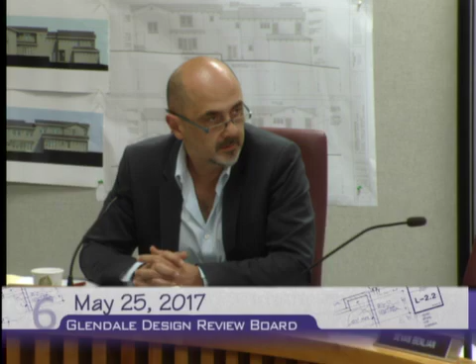Members of the board, this first item before you is the demolition of the existing buildings on site located at 2653 Manhattan Avenue. There is currently a one-story, 841-square-foot single-family house with a detached garage constructed in 1947, and the applicant is proposing to construct a new duplex.

The project is located on a through lot, which means you have a dual frontage, one on Manhattan Avenue and one on the opposite street, which is Pickens Street. So one of the units will face Manhattan Avenue, and the second unit will face Pickens Street. The design is one structure, two stories in height, with attached garages facing each street.

The total combined floor area for both units will be 3,332 square feet, not including the attached 441 square foot 2-car garage. The square footage of the lot is 7,022 square feet, and the project is located in the R3050 moderate density residential zone, which is multifamily. So in this case, the duplex is a permitted density based on the size of the lot.

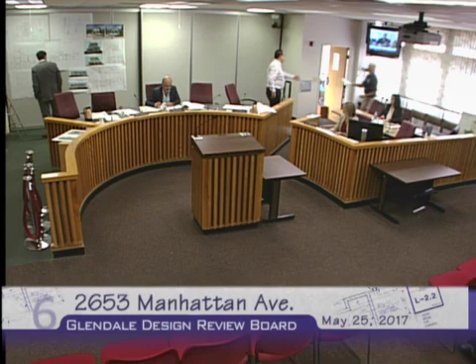While this is happening, I have a couple of questions. So this is an R3050 zone. Correct. What is the maximum height allowed? It would be 26 feet for a flat, but because this has a pitch, you get an additional 5 feet overall, so about 31 feet. Correct.

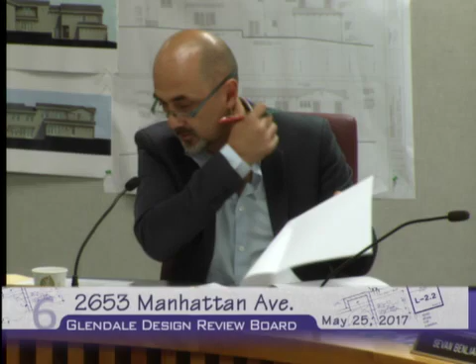Correct. All right, and then the question that I have is that when I'm looking at the southeast elevation, disregarding the design and everything, and the measurement that I'm seeing from the low point, which is on the left, shown as 26 feet, wouldn't that dimension be measured to the ridge line of the facade that is facing Pickens?

I mean, the overall building? I'm sorry, Board Member Malikian, what page are you looking at? This elevation, or any one of them, this one is going up to this point, but wouldn't it go to that point? Because that one is higher? It would be for the overall building. Overall height? Yes. Okay, overall height, okay, correct. So then if it is 25, or 26 plus another 5, so it should be okay.

It seems that there is a break in the grade, on the south or same elevation, or both elevations. There is a slope difference, a grade difference there. Hence the steps in the common area.

Okay, on the west-facing side, this has a 2-foot retaining wall. I believe there is a retaining wall there, yes. It's actually a 3-foot retaining wall, and some steps as well, which are shown on the landscape plan.

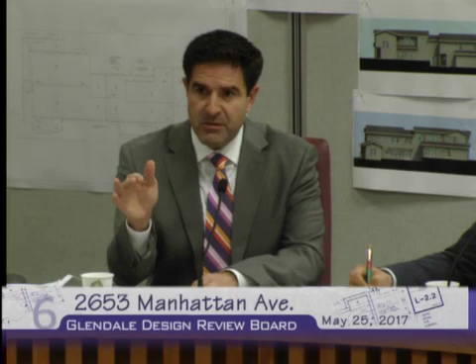Okay, thank you. I had a question as it relates to reducing mass and height of the building. So you mentioned that you might be able to shave a foot off the structure. What are some other ideas you could think of, very quickly, as far as lowering the height of the building?

If it came to it, we could drop the ceiling height on the first floor as well, from 9 to 8. But if you wanted to avoid reducing the ceiling height, grading-wise, let's say if you graded a little bit more than what you're doing now, what do you think you could achieve? I don't think we can because of the oak trees, we need to protect the roots. I can let Jeremy discuss that, but in general we're trying to not dig down on this property very much.

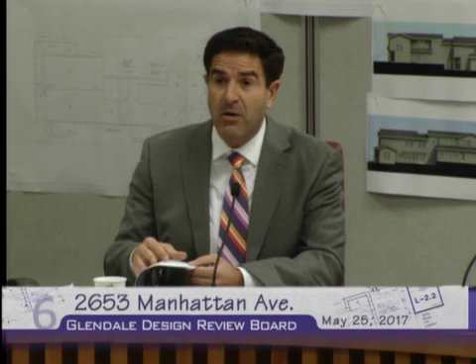Actually, maybe if you could stay up here for a question for the arborist.

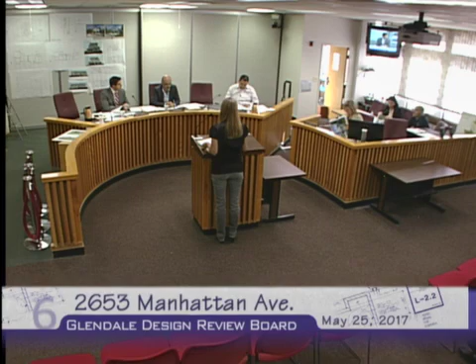Based on your observation of the existing trees, can the site be further graded if the intent is to reduce the height of the building? Can the site be further graded without damaging the existing roots of the oak trees? No, it would damage the roots of the existing oak trees. Okay, thank you.

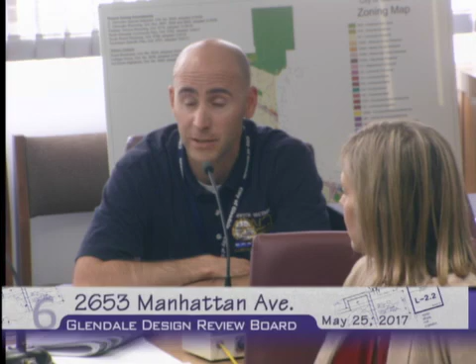Going back to Jeremy, I do have a question for you. It seems like there's a lack of information on the retaining walls and the cut and fill. There's some change there based on the section I've seen, because I don't have a grading plan. Have you reviewed the plans regarding these retaining walls that are proposed? They're going right under the oak trees and everything else. I have not seen a grading plan either. I do have a copy of the elevation plans, but I've mostly been going off the indigenous tree report and the site plans.

The question I have pertains mostly to the Pickens side. It seems there's a drip line that goes over the second floor already, and based on what I'm hearing, you've reviewed it and you're fine with the way it's being proposed. It's already impacting under the oak tree, so on the ground level it's the same. So is there going to be a huge impact if this is shifted over approximately a couple of feet so that this angle is in line with the back of this? The reason I'm asking is because it's going to affect the exterior. So is there a big impact on that?

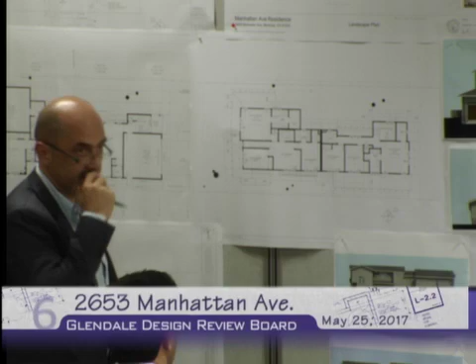The encroachment's almost the same. It's still within the drip line, so I wouldn't think so. Okay, that's all. If it was a question between eliminating it or putting it in, obviously that's different. Right, okay, so we can keep that in mind, and then we'll talk when we...

All right, Mr. Bellion, would you like to start?

Overall, I like the design. I think design and details are done well. I like the idea of keeping it consistent with the neighborhood, designing it as if it's two separate single-family homes. Designing it as two separate single families, even though it's one building, but you're creating two frontages, which is consistent with the single-family neighborhood. So I like that. I think there are a lot of good things going on with this project.

As board members we can appreciate the effort of designing around the oak trees. We always get projects where people take the easiest way, just take out two oak trees and plant a few to replace them. You guys are not doing that. You took the hard way and designed around that, and that's not easy. That's a big constraint.

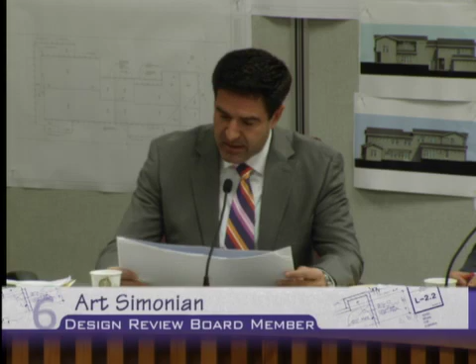Overall, I think just starting out, the Manhattan facade seems to read very well. It does have articulation, design features consistent with the craftsman style. The porch, the entry, the proportions, and most importantly, the roof line works very nicely off of Manhattan.

It was kind of nice to have the arborist input as well as we're looking at all the oak trees, because a lot of effort has been taken to try to accommodate the existing oaks, which we appreciate. And so—

On the other hand, as we look at Pickens, that facade and the roof design over that unit, I think has some room for improvement. If that facade is improved and that roof line is improved, in line with the same typology as presented on Manhattan, it will actually reduce the height of the building.

Aesthetically, because as we're looking at the Manhattan facade, you notice the roof in the background, which is really the roof over the living space off of Pickens. If that orientation is switched and some more undulation is done on the facade, then in reality you're reducing the amount of roof you're seeing from Manhattan, and it's a much more consistent roof line.

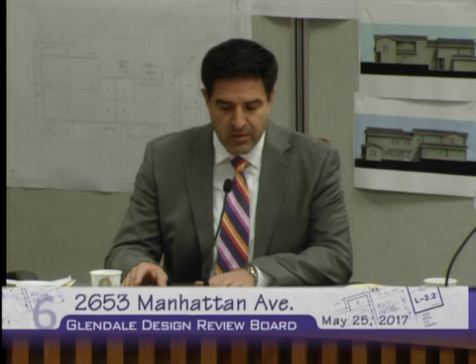Overall, I think the way to look at it is the overall mass of the building and the roof line should kind of conform. And if you're having problems with some of those side porches and side entrances, maybe with the use of some smaller garden walls, you could kind of create the landings that you need.

In a way, you got to look at the overall site, design the grading in a way that minimizes the height of the building, and then try to accommodate the actual landings of the side doors. That could easily be done with some garden walls to create those openings you need, and make sure those heights work accordingly.

So overall, I would support the project if we're able to rework the Pickens facade and undulate it differently, and also rework the roof line, which I think all kind of happens at the same time. Those are my comments. Thank you.

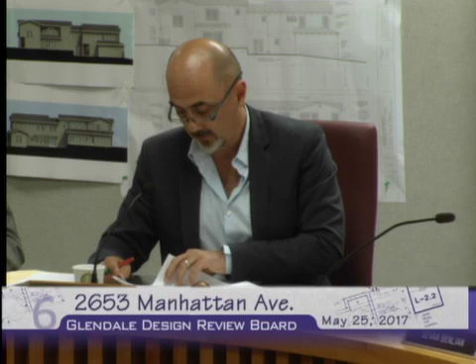I'm trying to assess the site plan and the amount of work that is being proposed, and it's fairly difficult for me to get a grasp on it. I've been trying to put together some ideas about what is happening between the landscape drawing and the site plan that is shown. I really think that the proper site plan needs to be put together so the city arborists can actually fully understand what is being proposed.

Some of the grading and the retaining walls are being proposed under the existing oak trees. Also, they would need to address some of the retaining wall off of Manhattan, how they're going to cut that off, because that thing is not really stable enough for it to be cut off, and how it's being wrapped around as shown on the landscape plan.

So a proposal should be given of how they're going to be removing a 5-foot retaining wall or so, whatever the dimension is. It's kind of vague on that part. As far as the Pickens elevation, and the reason I've asked those questions—

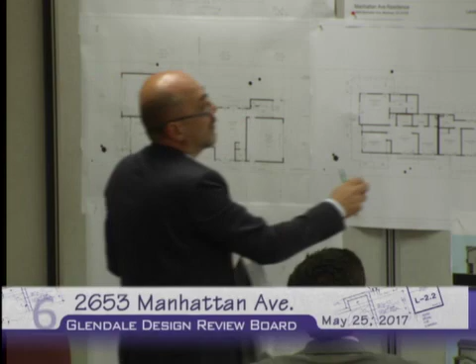I'll try to explain this: if this portion of the stairs and the patio, the covered porch and the stairs, could be pushed back at least a couple of feet so it's in line with the back of the garage, what it'll do is allow the entire section here to move back, creating something similar to this.

At the same time, I don't like to get into the bedrooms and everything, but if it's going to help make this project's exterior work better—right now this is not really selling the project for me. So it's not doing anything. I think there's definitely room to improve and be able to move this back.

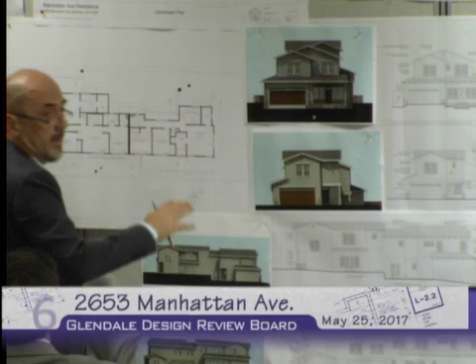So in order for the roof to be wrapped around as it has been on the Manhattan elevation, the detailing here lacks completely the effort that has been placed from this side. But there are ways, and the comment that I got from the applicant was about trying to avoid the roots of

damaging the oak trees. Most of the stuff we're proposing is on the second floor rather than the ground floor, so I think the ground floor will be designed with the observation of arborists being on site. So I don't have a problem with that.

I agree with the comments, some of the details and everything that's being proposed. So other than that, as far as the height, I'm fine with lowering it, I mean, eating up away from the crawl space, and be able to kind of differentiate the stepping and playing with the contour of the hill. So it's not going to jeopardize the design nor impact anything. It's actually going to be less impact to the trees as well.

Right, so which kind of dovetails with what you were saying. If there is a detailed site plan depicting the retaining walls as well, then they'll be able to carve that out. Yeah.

There is a discrepancy between some of the elevations that are being indicated on the landscaping and the elevations. The only elevations that I see as far as grades are shown literally on the elevation rather than on the ground site plan. So it's kind of difficult to locate the retaining walls and how much cut and fill they're proposing and so on and so forth.

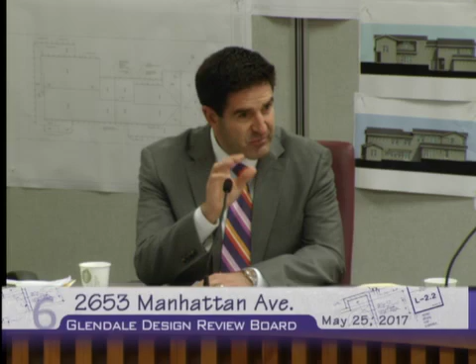I guess before we get to the second part, which is what you just were referring to, that deals with crawl space reduction from 9 feet to 8 feet, or the reduction of the crawl space, which is a separate condition. I think Board Member Malikian also indicated pushing back the facade on Pickens to create the sort of roof line that exists over the porch and the garage on Manhattan as well.

Now, the pushing back, is that on the second floor or just that portion above the entryway? Second floor, just the second floor. Okay, so actually creating a break in the front facade. Exactly, on the Pickens side. Create this kind of a roof, similar to the Manhattan side. Right, yes. Okay, I got that.

Another condition was to submit an accurate site plan and elevation that accurately depicts site walls, topography, and retaining walls. I would also include spot elevations so staff can accurately see the existing conditions and proposed cut and fill.

There was also something about considering modifying the interior floor plan, which came from Board Member Malikian. There are ways they can do that, such as pushing the stair section, porch, and stairs back. That would be a condition in order for them to break up the second floor, for example, by doing the floor plan modification as well.

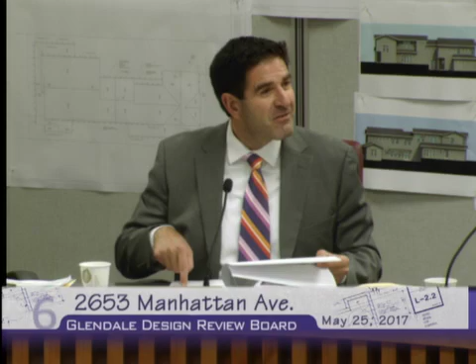Let's clarify that as a condition. I think it's the wood frame around the windows, the wood surround, not the windows themselves. Okay, so typical, like a block frame, having that window recessed within that wood frame opening. Got it. So then the fiberglass windows as presented is fine. Correct. Thank you for that clarification.

So do I have a motion? I'll move to approve the project with those conditions. I second that. That was a motion to approve with conditions by Board Member Simonian and a second by Board Member Benlian. Board Member Simonian? Yes. Board Member Benlian? Yes. Chairperson Malikian? Yes. Motion carries 3-0.

We have two different minutes, one from April 13, and minutes from March 23rd, where board members Benlian, Charchian, and Malikian were present. I need to pass the gavel to Mr. Simonian, and then we make the motion. I will pass this along to you, sir. I'll make the motion to approve the minutes. Second. Motion passes with a 2-0 vote. For the record, the gavel is being passed back to Chairperson Malikian.

Thank you, Mr. Simonian. We also have the meeting minutes from April 13th, 2017, where board members Benlian, Charchian, Malikian, and Simonian were present, so all four. I'll move to approve the minutes. I'll second them. Motion by board member Benlian, second by board member Simonian. Roll call: board member Benlian, yes; board member Simonian, yes; Chairman Malikian, yes. The motion passes 3-0.